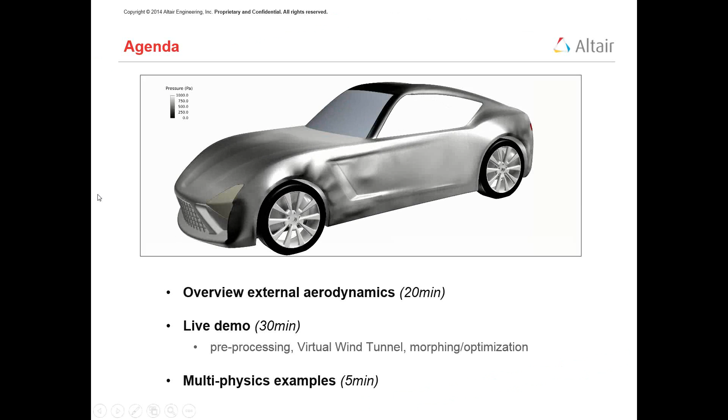So this is a short agenda over here. I'll go over some of the critical aspects of the domain, the dimensions of the domain, how to set up the case, and what things you need to take care of beforehand.

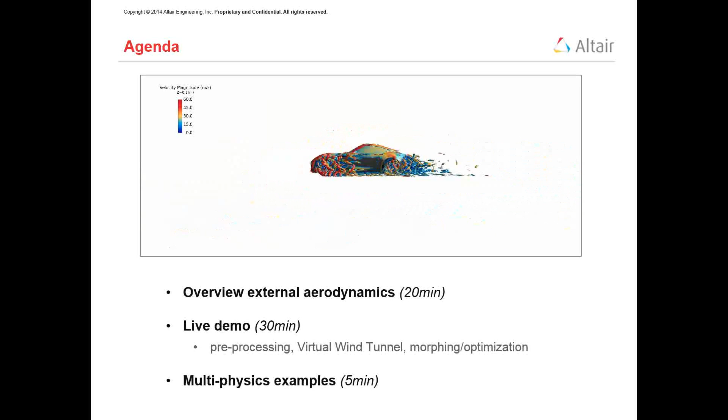I'll cover that for about 20 minutes, and then I'll go directly into a live demo where I'll show you actually how to set up a case in virtual wind tunnel, and how you can also do minor morphing, like design changes, again get it back into virtual wind tunnel, and then do the optimization kind of studies.

And then I also have some videos, like eye candy videos, to show you about multiphysics, mainly FSI or acoustics kind of studies. But it's too much information if I have to explain everything, so right now I'm just going to have eye candy videos to show you.

So why do we do external aerodynamics? Mostly, a lot of things depend on the outer shape of the car: its performance, fuel economy, how much can be the maximum speed of your car, acceleration of the car, and for the cooling of engine, transmission - all these are really important components. They need to be cooled.

Also, if you think of comfort of the driver in the cars, you need a good HVAC, especially if you're sitting in Arizona in the month of July. Then you need to have a good HVAC, and the air which is blowing over the car is the same air which is ultimately used for your HVAC, so it needs to be channeled or guided in a proper way, so that you have effective cooling or heating.

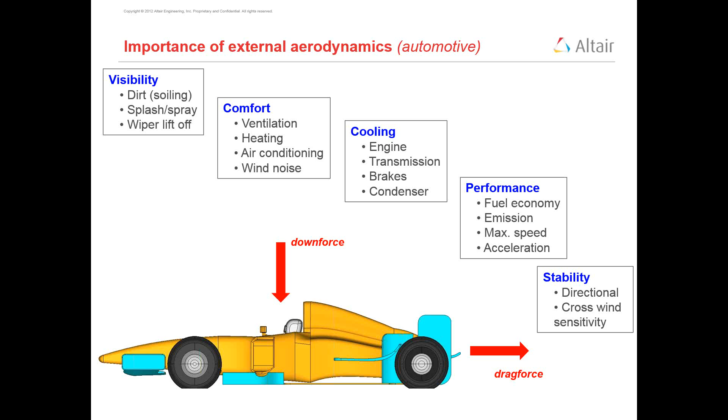And then there's also a drag force. Drag basically depends on a lot of things in the car design. It is ultimately a resistance to the car, so it has to be reduced as much as possible.

And then there are things like multiphysics. For example, the spoiler over here at the rear end, if it is flapping and flutter and starts vibrating, and if at all that frequency matches with the natural frequency, all of your car is going to vibrate very badly, and you really don't want that.

So FSI is fluid structure interaction, and this is one important area of research in F1 cars. Or there is also aeroacoustics, because the wind which blows over the car generates some eddies, and those eddies are traveling from the side of the car, which is very much at the same height as your ears. So if they generate any noise, it's really going to be uncomfortable for the drivers. So even that becomes a part of multiphysics.

This diagram at the top, it's the three things we are really concerned of: drag, lift, and side force because of the cross wind sensitivity. Now, the lift is actually a force in the upward direction, which is not required, but which is generated in the car systems. We actually want a downward force, but the lift is the upward force, and we don't want that. So lift, drag, and the side force are the three forces to avoid.

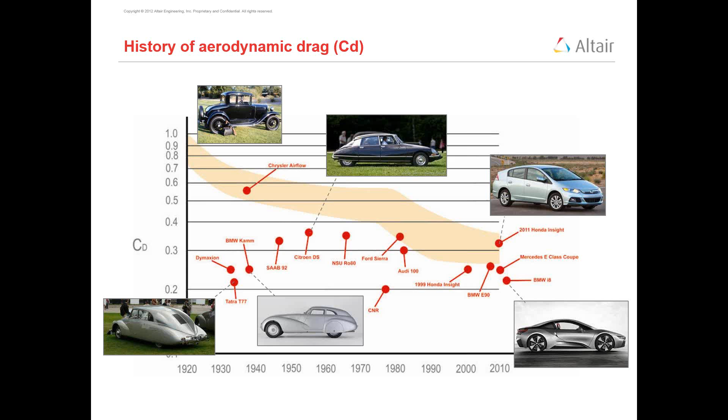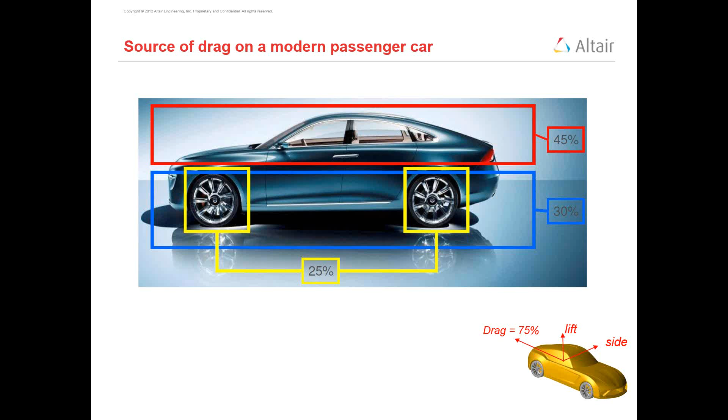How they design the upper body, which is actually the face of the car, and then the technicians and the designers have to come to some compromise point where it looks good as well as it performs well. So that's always a challenge.

And when designing the rim, you also have to remember that the rim not only has a drag, but it also helps in cooling the brakes. So you cannot neglect that fact, a very important aspect of rim design.

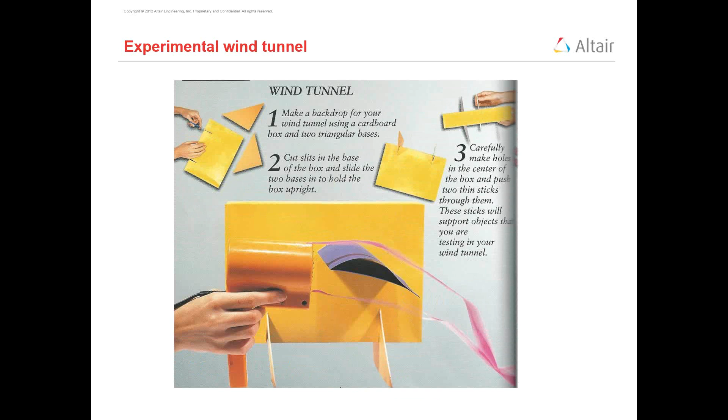So yeah, different kinds of testing, and there are always sensors around which calculate the drag and various different things in the test area. Also, the cars can be tested in full scale or scaled down models.

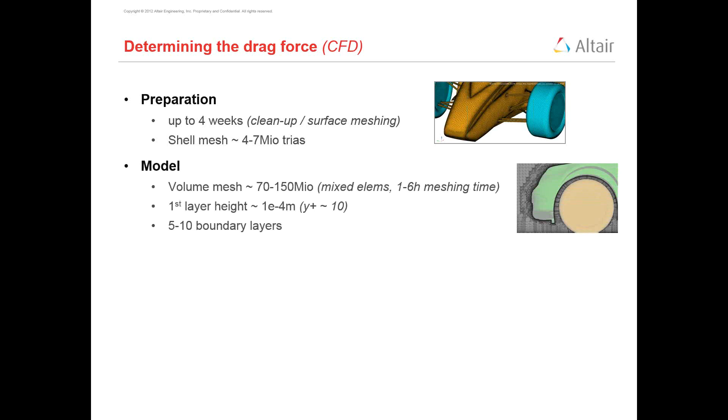So I try to eliminate and reduce my model, then connect it well and then surface mesh it. Those things do take a lot of time, and they are boring sometimes, but they are really important. Then the volume mesh goes anywhere from 70 to 150 million. It shouldn't take as much time for the volume mesh if you have prepared your model well.

Then in CFD, there is also something called boundary layers. These are the mesh layers close to all the car parts, mainly to capture the wall gradients from the car to the outer domain. These boundary layers can be as small as 1e-4 meters. And on the actual car surface mesh, you can have a mesh size somewhere between 2 to 10 millimeters.

It depends on how much of the details you want to capture on the car, or if you have some extra details on the rear side of the car, like special wings, then you might need an even smaller mesh size over there.

For the CFD run, it's always good to run a transient, because the process in life is actually transient. It can take about 2 or 3 days to run the transient model, again depending on how many cores you are using. It's usually simulated for a physical time of somewhere like 3 to 4 seconds, but it is going to take more than 2 days to get the results.

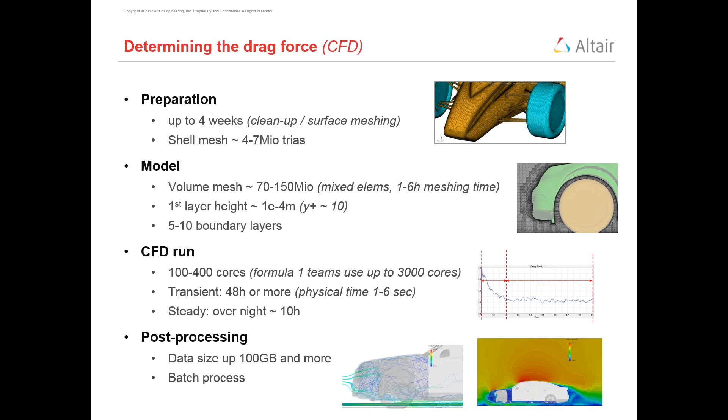And when you have all this simulation ready, you have a lot of data to post-process. So you need good machines, not only to run your case, but also to handle all this data, because you may have requested a solution on different surfaces, cut sections, or different points, and the sizes become really huge.

A few of the modeling aspects: when constructing a wind tunnel in a simulation, it's always good to have 3 car lengths of distance in front of the car, and about 7 or even more car lengths at the rear end of the car. The blockage ideally should be like 2%, and by blockage I mean the ratio of the car frontal area to the inflow area. That has to be only 2%. So that is a rough idea of how big the wind tunnel should be.

Surface mesh: for any of the VWT or AcuSolve runs, I usually have tria elements over the surface, and my size, as I said before, varies from 2 to 10 millimeters. Then for the volume mesh, this over here is not actually a wind tunnel. These are the refinement zones I have built outside the car, but close to the car.

So I'm specifying a refined size close to the car, and then gradually increasing that, and I may not have a very fine mesh size far away, like at the 50-meter end of the wind tunnel. The mesh size there can be somewhere like 0.2 meters. But I do need refinement zones around the car so that the mesh grows gradually. You cannot ever have a sudden jump in CFD runs, because that induces errors, and that's one of the reasons for non-convergence.

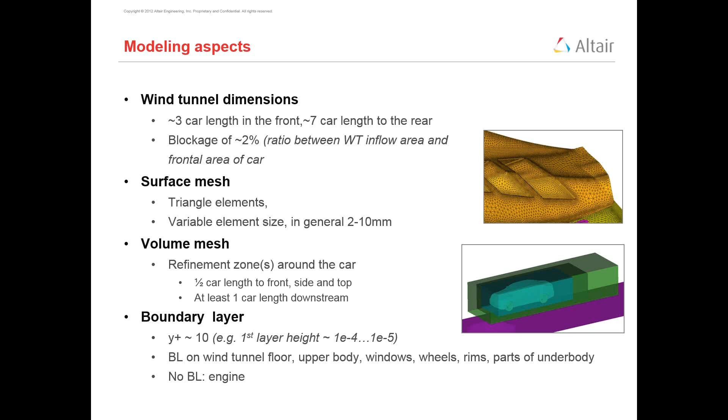Then there are a few things about wheel modeling, like how you can have the rotation of the wheels modeled. The first one is really simple: just have rotating velocity applied to the wheel, but this is a steady state run. The second type is MRF, which stands for multiple reference frame or moving reference frame. In this, you add an extra source term to the right side of the equations and solve them only in the specified zones. So these equations with the source terms will be solved only where you say that these parts are rotating. That is kind of a steady state approximation of a rotating flow.

And then there is also sliding mesh, in which wheels are actually rotating. So the outer face of the wheel is sliding with that of the car. So it's actually a transient run.

Then there's one more thing you can do: you can model your car as just half of the car and have a symmetry condition applied. This is a very good way, because you can have refined mesh only in one part of your car, so you're capturing all the details in the car but also limiting your mesh count. So sometimes this really helps in controlling your mesh count and still having good results.

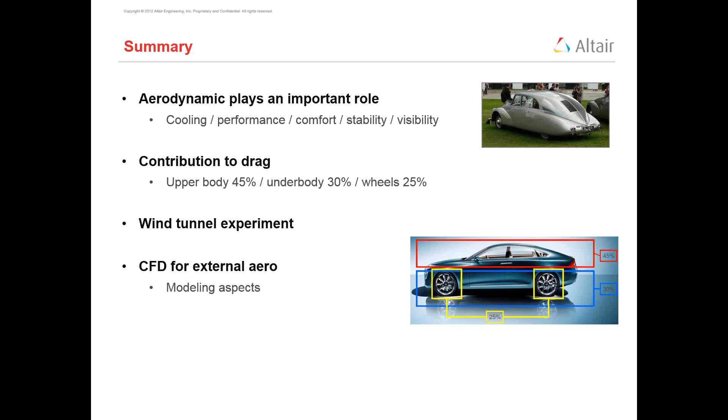Yeah, I do have one question. Okay. All right, we do have a couple of questions here, so I'm going to take a moment so we can go over those, Madhura. So the first one here

is the wind tunnel also given a symmetry condition when modeling a car using symmetry? So the question is, is the wind tunnel given a symmetry condition when modeling a car using symmetry? Yes. Okay. All right.

The next question is, what is the difference between transient and steady state simulation? Okay, so in the transient run, we are actually simulating what happens when the car is placed in the wind tunnel, right from when the wind starts blowing. The wind is hitting the car and we see how the flow develops from t equal to 0 to t equal to, say, 3 seconds. So in a transient run, we are getting the result of only what happens in 3 seconds, but it takes 2 days to run it. So you can imagine how much physics goes on.

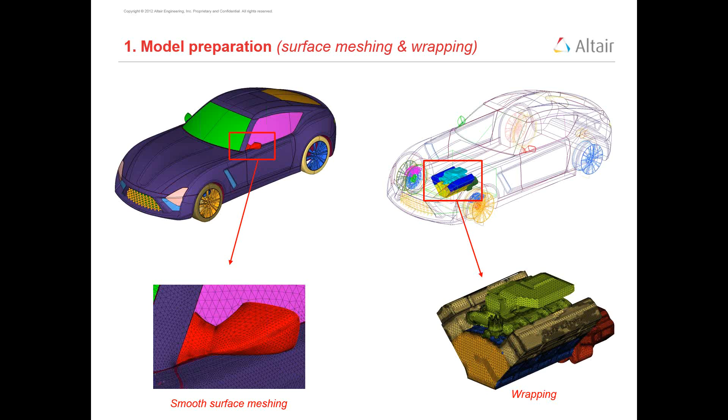Okay, so I'm first going to show you how to do surface meshing or wrapping in HyperMesh. So wrapping is meshing the parts, and it may not capture every single detail of that part, but it is one very quick way used in industry. So I have one part open over here.

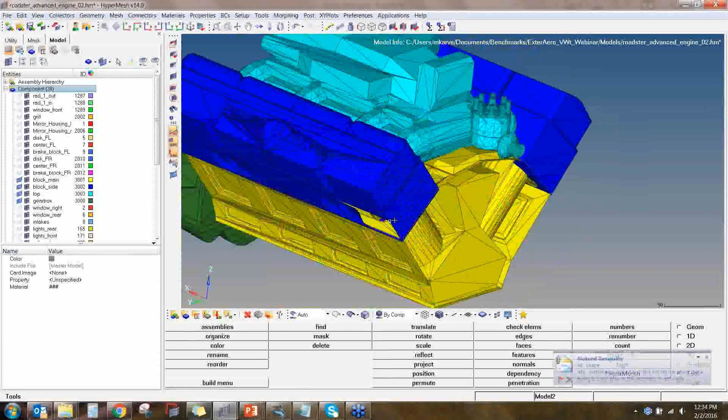And you see that I don't really have a great mesh over this. I just have some rough mesh; I don't need a very good mesh for wrapping. I just need some kind of surfaces so it identifies how the wrapping has to go. Now you see over here there are some holes in this CAD. There is this one on the blue surface, then there's also one surface missing at the bottom over here, and then also on the side this way.

So if I don't have it covered or stitched properly, what's going to happen is while wrapping it, it's going to go inside these parts, and it's not going to identify the part properly. I'm not sure if everyone really knows what wrapping is. Just imagine you are wrapping anything with paper. So that is what wrapping does in this mesh. It will identify the outer areas and put a mesh on all the outer areas of that particular part.

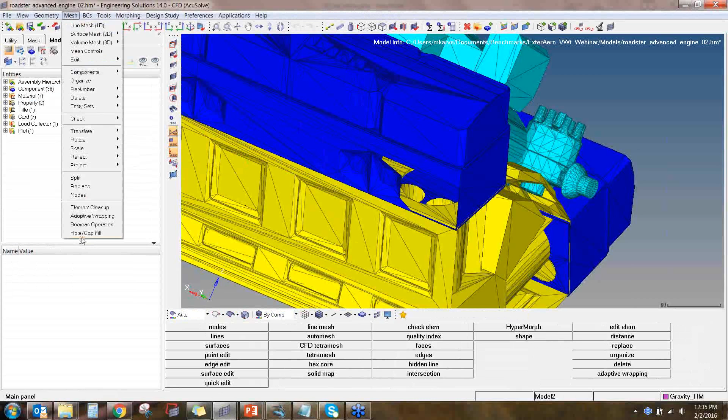So I'm quickly going to show you how to patch this hole. For that, open HyperMesh and make sure over here you change the user profile. Go to engineering solutions, select CFD, and be in the CFD user profile for this. Okay, so in mesh, if I select hole and gap fill, this is a very good and quick tool to patch things without much effort.

And what I need is to select elements, actually. I have to select patch fill, and then in the node list, if I select a few nodes over here, 1 and 2, then it identifies the path; make sure it has identified the correct path. If sometimes it doesn't identify, then you can unselect some of those wrong nodes, say proceed and say fill, and it created this patch over here, which looks good, not bad.

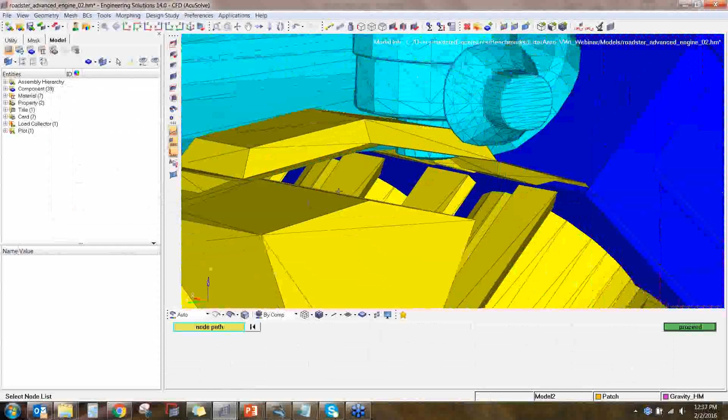Similarly, I can go and patch other sides of this. So node list and selecting a node path. Okay. So you see over here it selected some junk things and I don't want it. I want to unselect those nodes. Okay. Then, good. And say fill. Great.

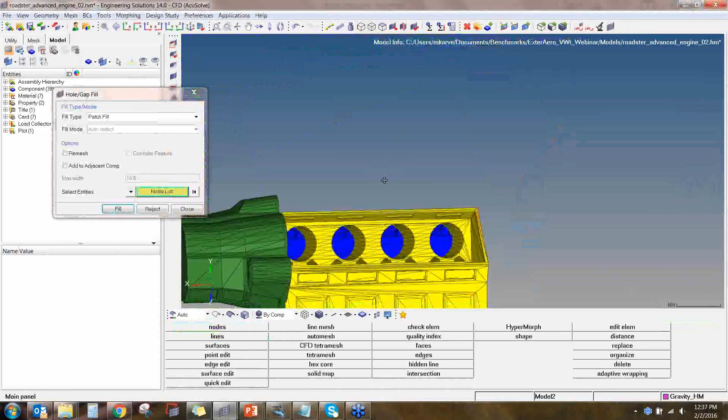You can try wrapping without patching it and see for yourself how it looks. Sometimes it does a good job, but it's always better to patch and do some work on the ground level. Proceed. Okay. So I have this mesh over here, and what I'm going to do is wrap it now.

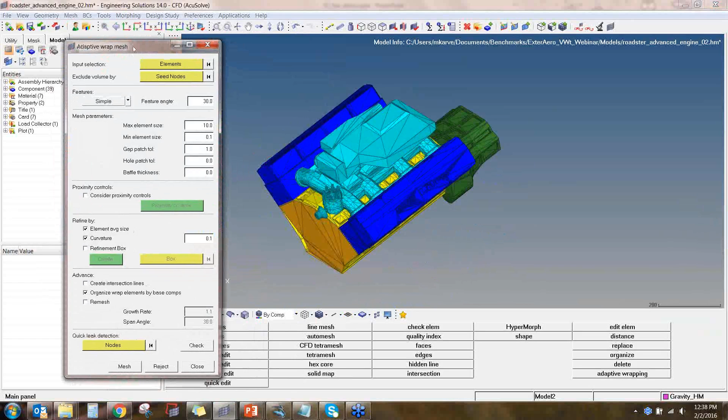So I go to mesh again and say adaptive wrapping. Even in this panel, there are some options to patch the holes, but I've already done it manually. So I'm going to select what elements should be covered in the wrap and just select a block. Proceed. I can say remesh over here and again give some parameters. This looks good for now, and say mesh. And while it takes some time, let me go over... so yeah, this is the wrapping.

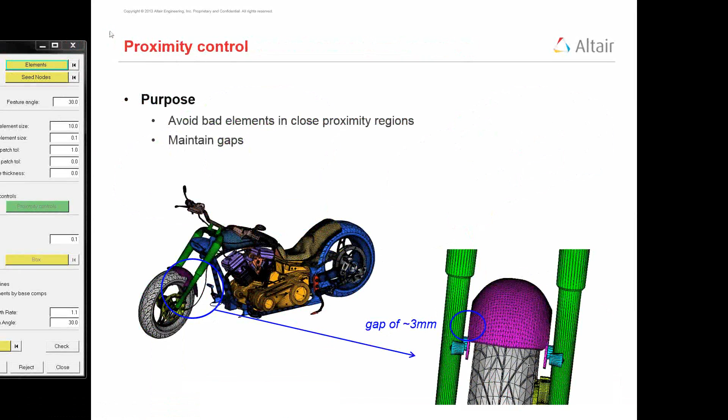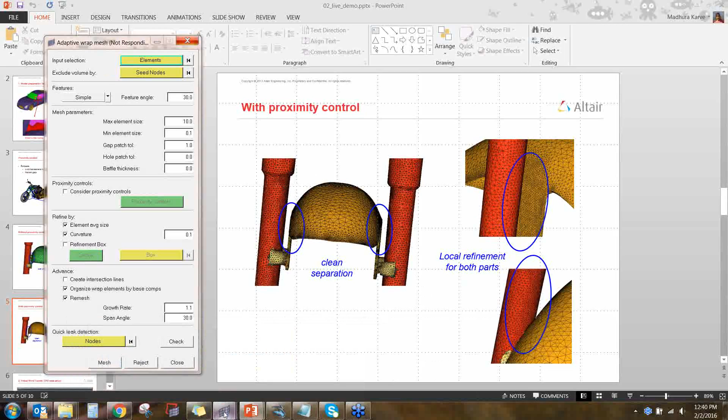That way, you have to specify two components, like this is A and this is B, and then it will also apply some local refinements in the gap and make a smooth, nice mesh in between that gap. So let's see if it has done it. Okay.

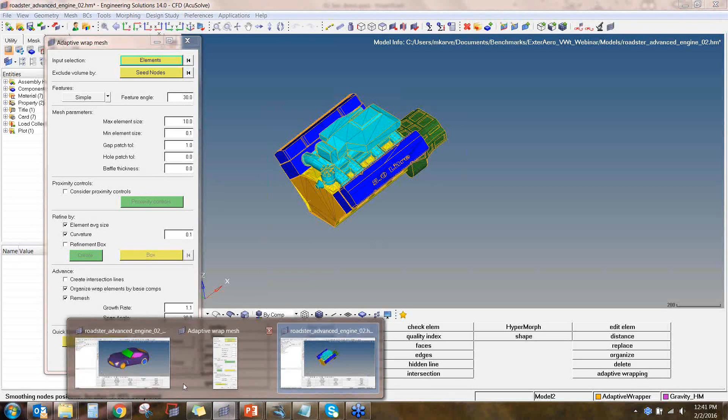Okay. So while it meshes, I'll show you how it looks. I already did it once, so yeah. So this is how it's going to look after it's finished wrapping. You can see it has captured all the important details well. It does look good enough.

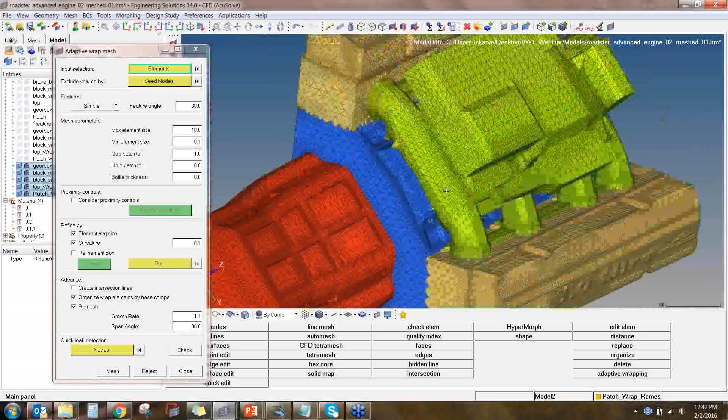So moving forward, meshing the rest of the components in your CAD, there's one panel which I use, this auto mesh panel. There are different ways you can access this auto mesh. It's right here, or also in Mesh 2D and auto mesh. So surface deviation is one of the menus I use. There are different menus over here. You can play and see how it behaves.

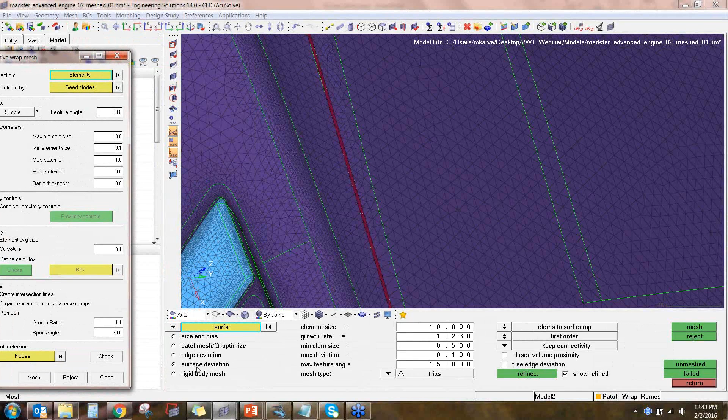But surface deviation is very helpful for geometries like this. You can specify, and it will capture the gradients and mesh it accordingly. Like you can see over here, at all the curvy edges, it tried to have a finer mesh as compared to the rest of the mesh. Also, you can specify the refinement surfaces. I am still waiting for this to finish so I can actually show it to you.

Okay. Now this is a rather large model. How long does it normally take? Right now you're doing it on your laptop. Actually, I did it previously, and it didn't take such a long time. Surprised it's taking long right now. Okay, I think it's done.

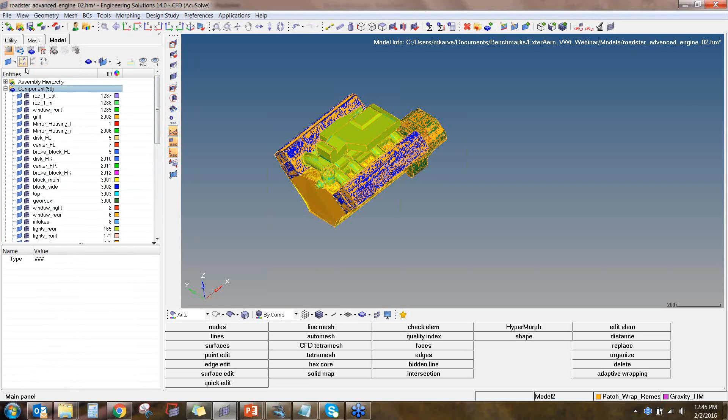Okay, so if I switch on the CAD, this is the remeshed part, which has a suffix like wrap and then also remesh. So what I'm going to do is isolate all these and also change the color. Okay. So yeah, you can see over here. Probably I had some different sizes than when I did it previously, but more or less it looks the same.

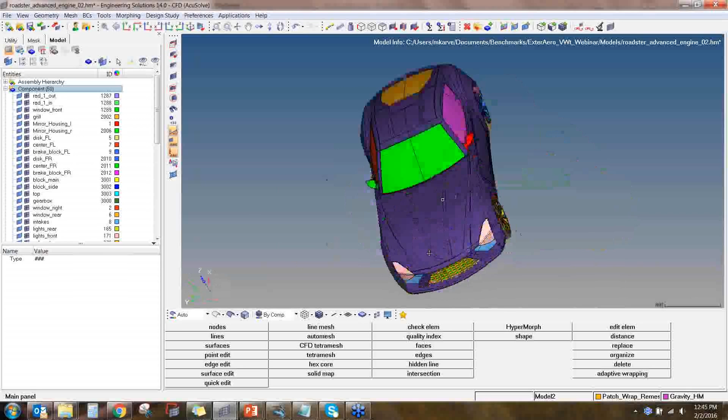Then let's go over the rest of the meshing. If I have to do all the meshing, it's really going to take a long time, but I'll quickly show you this auto mesh panel. In this surface deviation, let me just select a few of the surfaces and then mesh it. Hit mesh.

Yeah, I actually did this yesterday and it didn't take a long time at all. So we have something that's running. It's taking forever.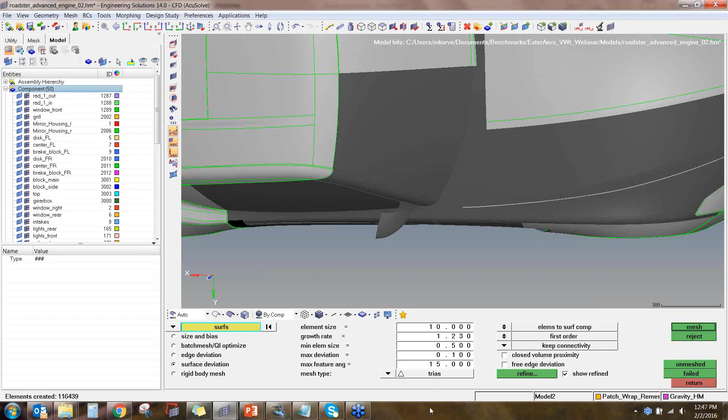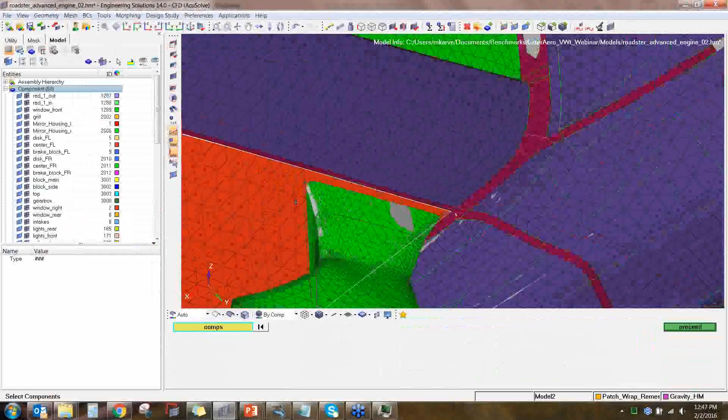Okay, so I have some mesh, and you can see over here that this mesh is not really a closed, airtight mesh. So there's one more tool which I can use. It's a Boolean operation. Even when you have meshed your parts, you can Boolean them. So I pick component 1, proceed, then component 2, which is this red colored mirror. Then I hit local remesh and run, and it will do the Boolean over the mesh.

Okay, so yeah, it did it. Now you can see all the nodes are matching nicely. So this is one easy tool to fix the mesh. You can also use this refine button over here. If I select some of the surfaces and say I want refinement over this particular surface, specify a smaller size, 0.5, say assign, and it will show you this in red color.

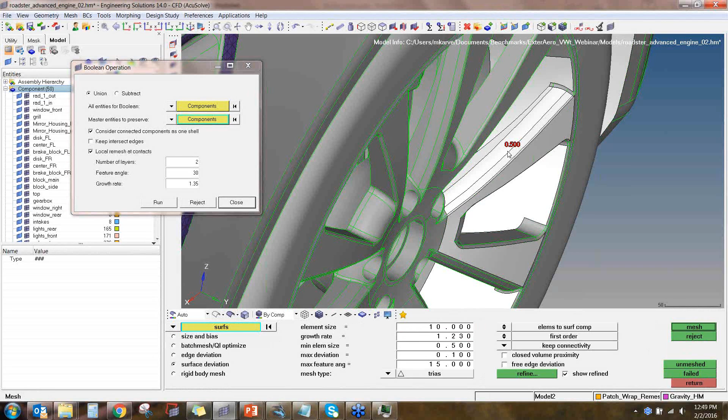That's the assigned mesh size, and if you mesh it with a higher number, it will do the refining for this mesh and also the smoothing from the refined to the higher mesh size gradually. So that's one more good tool to use. All this meshing may take a long time, but you have to do a good job on it, especially these grills over here. You need very nice mesh over them. These grills are doing a lot of things in the model. So make sure you have proper mesh over them, or any other tiny features at the rear or at the wheels.

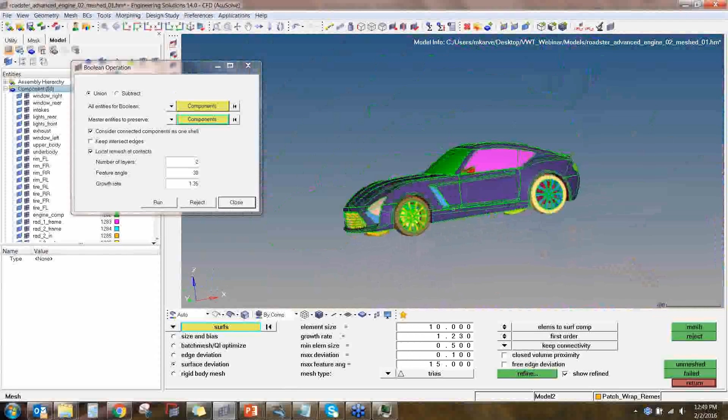Okay, so I have finished my meshing, and the next step is to go to export. This is my completed model. I say export, select CFD type, and in the solver type make sure you have Nastran Fluent standard format, and hit export. No, I have to select. Okay. And yes. Alright, so I had some duplicate elements over here.

I'm going to go and say check elements, duplicates. It found 10 duplicates. Say failed, return. Then go to the delete button, which is this shortcut over here. Say retrieve, and it has retrieved those 10 elements which were detected as duplicates, and say delete. Return. And I again hit export. Say yes.

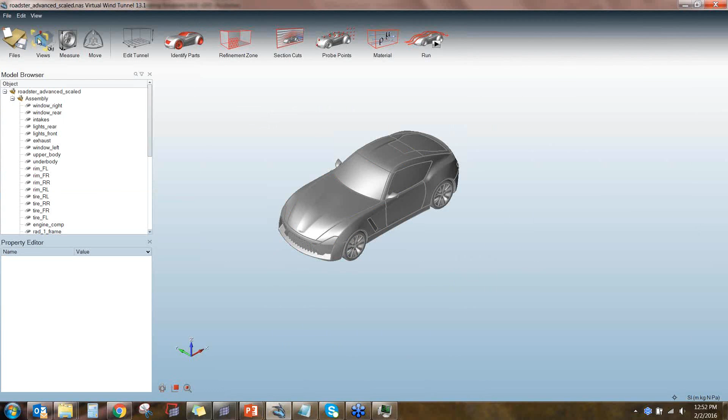Okay, so it exports, and this is how it looks in VWT. You just go to file and find the exported Nastran file. There are different views over here. Just hover your mouse over different sides, and it will show you what are the different views you can have. So I'll normally keep this.

Excuse me, one question. How long did it take to import the model? Oh, no, it shouldn't take long, like a few seconds. There's many hundreds of thousands of elements. It only takes 3 seconds. Good to know, excellent.

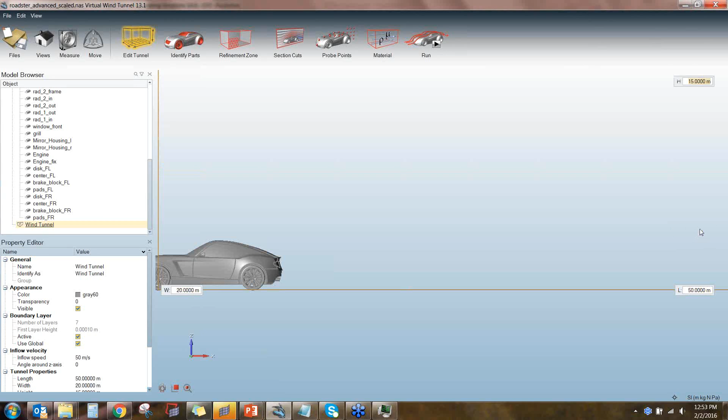Okay, so moving on, let's go with defining the wind tunnel. Just click it over here and say fit screen, and it's going to show me the default dimensions. But as I said, you really need to have a proper dimension with just 2% of blockage. So I'm going to say I want it 50 in length, 20 in width, and then 15. Okay, so this is how it looks.

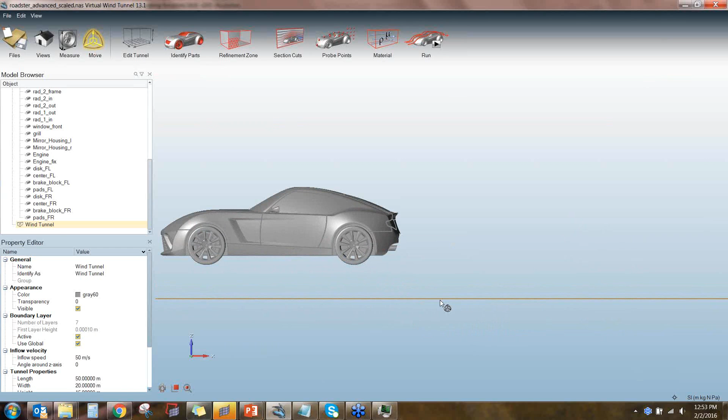Okay, looks good. And then one more thing which I need to make sure, I'm going to say move and go to wind tunnel. So it gives me XYZ coordinates. And then move this at the bottom and get a proper zoom over here. And then make sure I move my wind tunnel in Z direction.

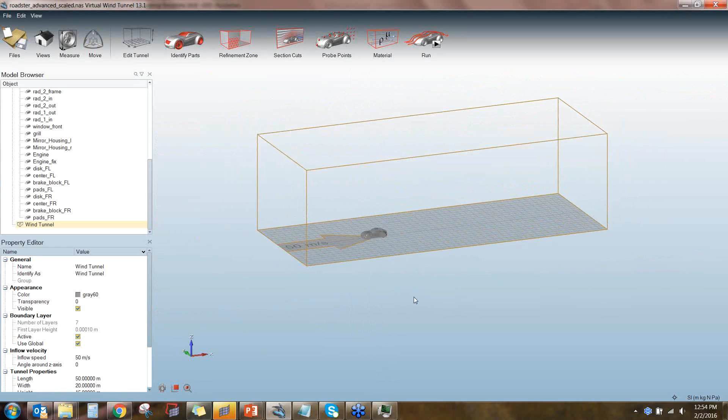Okay, so I want the wind tunnel to intersect my wheels slightly. Make sure your car is still inside the wind tunnel. Sometimes, when you're moving things all over, it happens that the car comes outside your wind tunnel. So just make sure your car is still inside.

So let me hide this wind tunnel now, and then the best way to set up the case in VWT, or most of our products, is always to move from left to right side. So we're done with the wind tunnel. Now we are going to identify different parts.

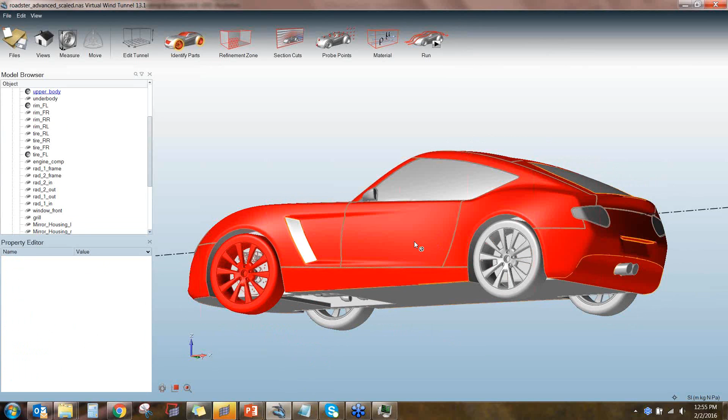Okay, so if I hover my mouse over this, it will show me identify wheels. So I'm going to click that and click the rims and the wheels. So this is my tire 1. Oops, I selected the wrong thing, and I have to deselect it. Why is it not deselecting? Okay, so deselected it and go to the second wheel. This is my other wheel.

Okay, and you can see it has also identified the rotation direction of the wheels. It's based on the wind direction. So you see over here too, it changed the icon. And if I click on the rim, it will show me that this rim belongs to wheel 1, and then there is a tire which belongs to wheel 2. So it has identified rim and tires, and then put them in wheel 1, wheel 2, wheel 3, wheel 4.

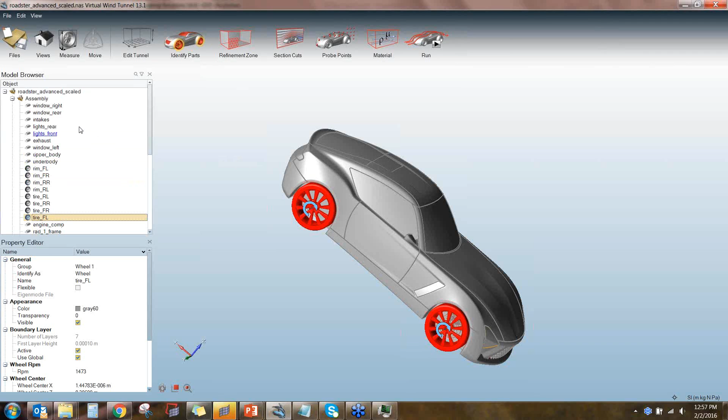The next thing will be identifying heat exchangers, which is the radiator. So what I'm going to do is hide all of the things, and switch on all these parts which mainly make it up, or you can select, right click and say isolate, it will show up. Say isolate, okay. Oh, come on. Anyways.

Okay, I want to make sure I'm still in the right direction. So, identifying heat exchanger.

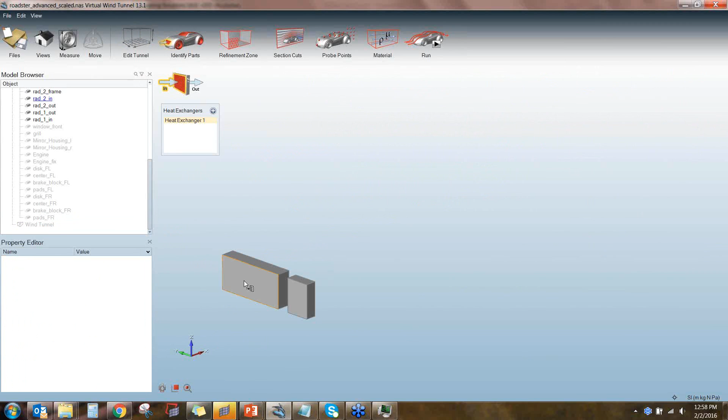So I go here, and then the first thing I have to do is select inlet. You can see this over here is highlighted. So select the inlets, this one and this one, and then the next thing is to select the outlets. Go over here, outs, and see this is my outlet and this is my outlet. So when I specify inlet, which is blue, and the red is outlet, the remaining thing it will automatically detect as the frame.

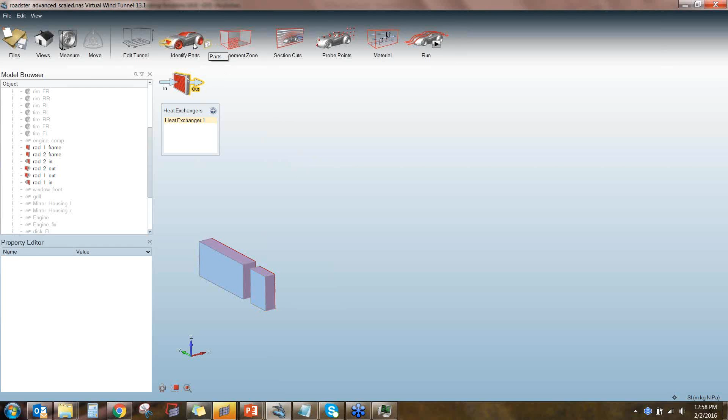So you see here again the icon of all the heat exchanger elements have changed from the default to the special thing. Then what you can do is there is this small icon for almost all of these options over here, and if you click it, it gives you a nice summary of all the parts in it, what they are identified as, and then you can also select which of them you want to have or not. Like if some of these things are really in the interior, you can uncheck this boundary layer, so your mesh size is not blowing up.

Okay, we have identified all the parts. Let me switch on all the CAD or mesh.

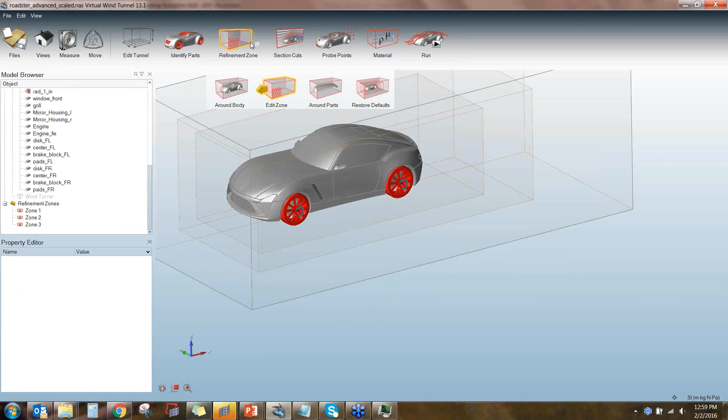Now, this is the refinement zone. You can build as many refinement zones as you want. If I just click one, there are by default 3 already defined, and then if I go to this tabular form again, I can specify these are the default sizes of element sizes, but you can definitely change them. You can also change the size of refinement zone.

If I click this, you see that it will show you the direction, and just drag your sides to whatever lengths you want. Similarly, you can do this, or you can hide some of the zones, or if you have defined them and don't want them, you can uncheck this button over here so it becomes inactive. So it's defined, but it's not going to be effective.

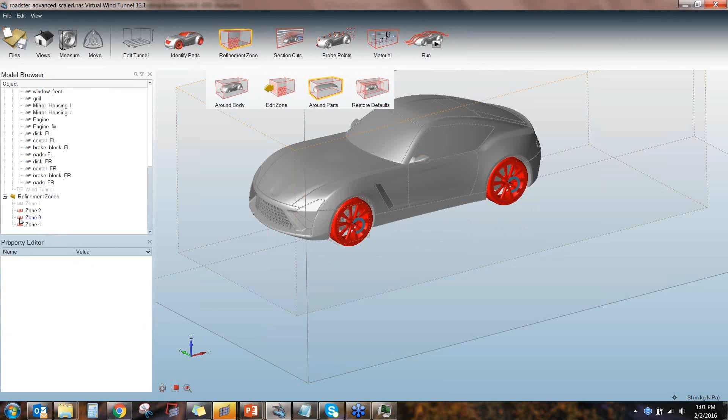If you want a special zone around, especially around some special parts like the upper body or the wheels, I can specify that I want it around this wheel, and then so this is the view I want, and easily drag this face.

Somehow it's not picking it up. Okay, so I can just change - I showed you how to change, but somehow it's not picking the right face over here.

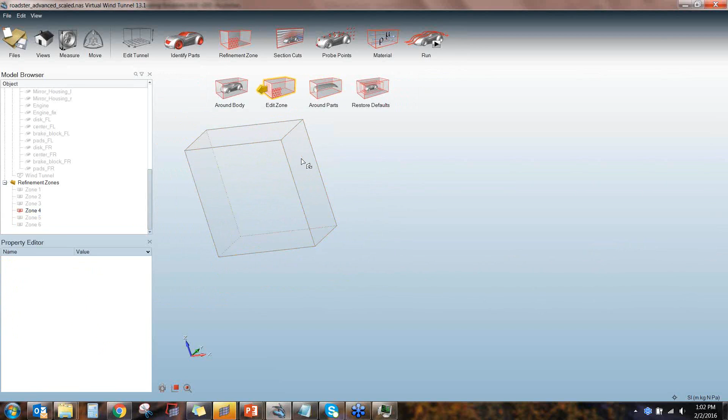Oh, I know why. I was not in the right option. So, okay. So you can change this, drag this. Make sure you're clicking this edit zone and then clicking the boundaries. So you can stretch this side as much as you want, so that it covers both of the wheels together, and again specify different refined mesh size over here.

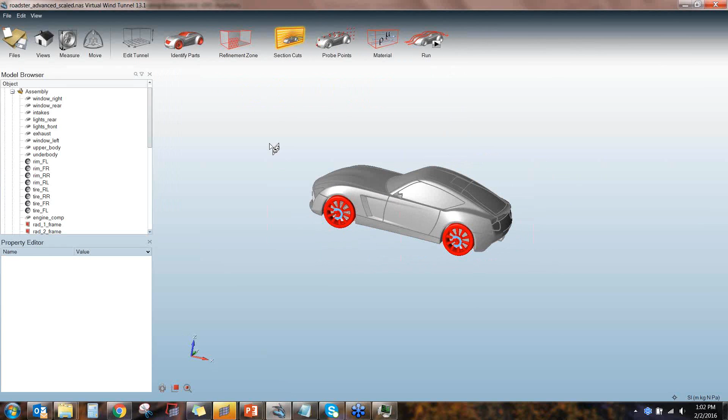Then the next thing you go to is section cuts. So section cut as well as the probe points are defined so that you get the results on all these sections or all the points. And at the end of the VWT simulation, you get an automated report with all the contours, and you can choose which contours you want it to plot.

So let me first create the cut section. So this is my one cut section, and then this blue shaded section is what it is right now showing your cut is. So I can still add as many as I want. If I want it in different directions, just switch that and switch on to the locations.

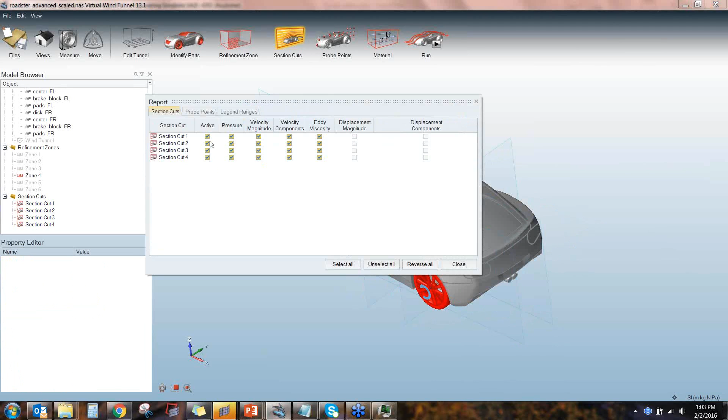You can also have the exact location depending on this, XYZ over here. Put in the coordinates and change the location of the section cuts. And if I open this table again, it gives you all these different results: velocity, components, eddy viscosity, pressure, velocity. And if you don't want all these results, you can uncheck them and select what you want to have output.

Can you rename the section cut names? Yeah, sure, you can do that. Over here, rename - you can rename anything, even the zones.

Then similarly, you can create probe points. Just click this, and if I especially want to see how the eddies happen around this mirror part, I click here. I can also move it, or if you know the exact coordinates in your CAD, enter the coordinates and you are all set.

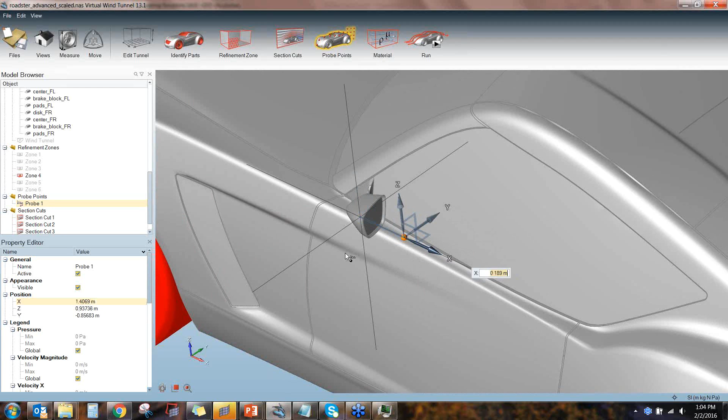And all these things which I've generated, you can see it in the side tree diagram: refinement zones, probe points, section cuts. You can directly delete it from here. If you say isolate, it's going to only show you that particular thing.

Where is it? Yeah, another question from a little earlier: is it necessary to model the heat exchangers exactly, like modeling the fins or tubes? No, I don't, I mean, not really.

In this heat exchanger which we have right now, it's not really modeled. It's just the outer size of the radiator. Ultimately, this will be modeled as a porous media in the CFD run, but you just need to identify which is the flow direction over here. So it may not be the exact tubes and the things. Even here, I don't have it - I just have the outer part, outer size of the radiator over here.

So it really depends on where you want to focus your analysis on. If you really want to fine-tune around the heat exchanger, your model should be done for that, I would say. So in a large model like this, you probably don't want to go for the detailed results of the heat exchanger.

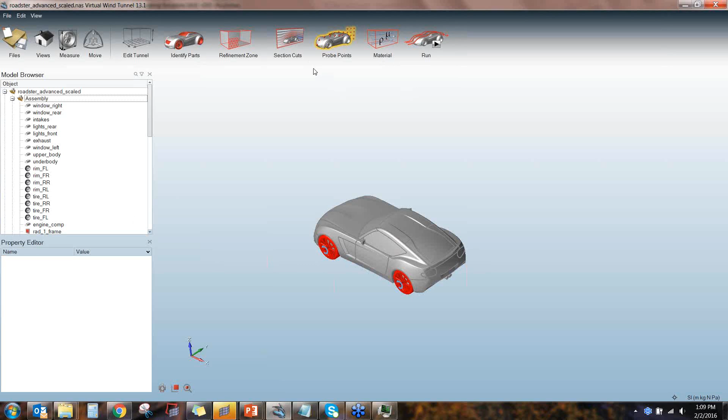So we have put in the section cuts and probe points. Next thing over here is material. By default, we do have air and water, but you can also define your own materials. And then hit this run.

So run has some of the mesh setup over here. You can also decide, like give the wind speed over here. By default, I think it is 50, and that's why when you load in your wind tunnel, you can see this 50 meters per second and the direction of the wind. Then you can decide if you want a transient or a steady state run. Run time, as I said, is usually about 3 seconds, and the time step can be as small as 0.001 or even smaller. So when you finish 1000 time steps, that's when you get a solution after 1 second. The time taken for those 1000 time steps depends on how many cores you're using and what the mesh size is. So it's important, every time you're doing these kinds of runs, to have the right balance between capturing all your features and keeping your mesh count in check.

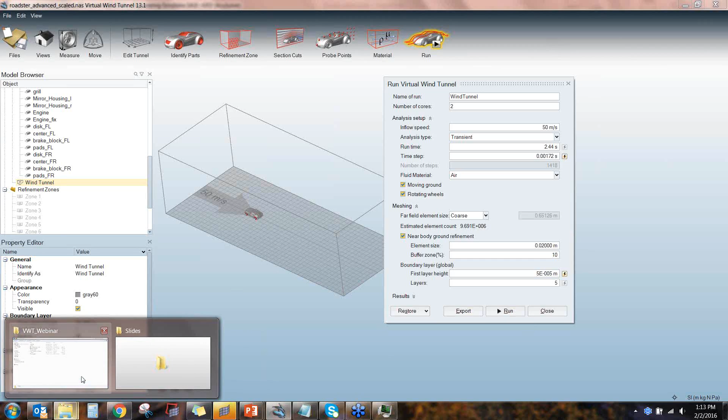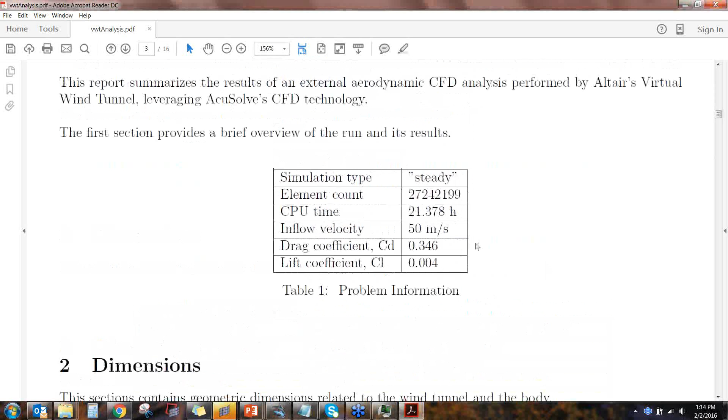And at the end, as I said, it creates this VWT PDF report, and this is how the report looks. Okay. So it will give you all these details, like mesh, simulation time, what kind of simulation it was. Drag and lift are automatically calculated over here. Then element count of the volume mesh, size, dimensions, and all these pictures it will automatically generate at different section cuts which you have defined.

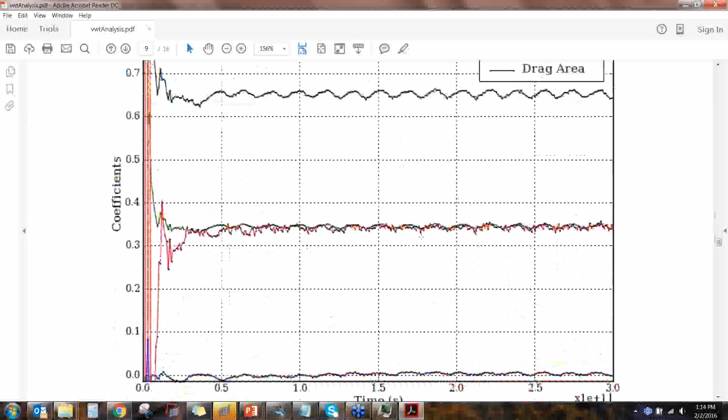So it has also calculated drag on each and every component. And that's by default. Yeah, it's by default, and all these contours, whichever you asked for, streamlines, and I think the plot which we saw at the top was for the probe points.

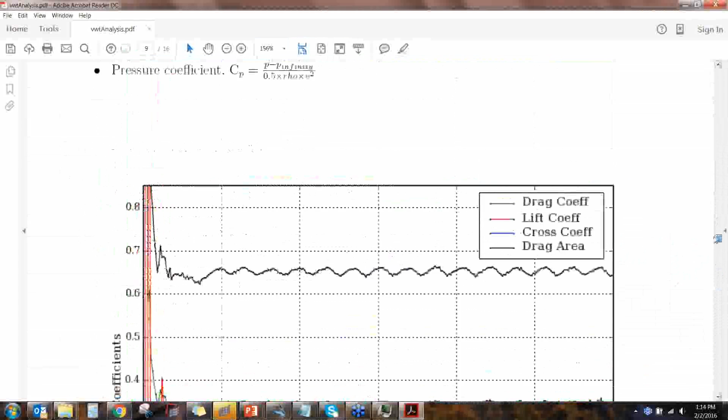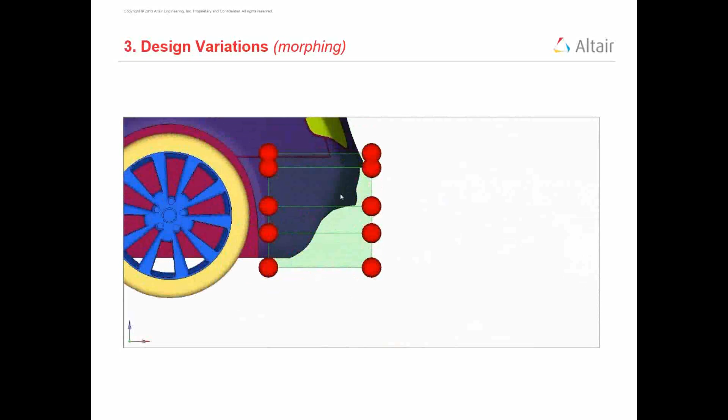Okay, so this is mainly the VWT part, and as I said, you can also do some morphing. So morphing is quick design changes to your model. I'll play this nice video over here, which is done in HyperMesh. These red dots are called handles, and you can generate these handles and just move them along XYZ, or if you have the coordinates, you can also move it to a particular coordinate, change your design, have the model ready, and again export it as a Nastran file.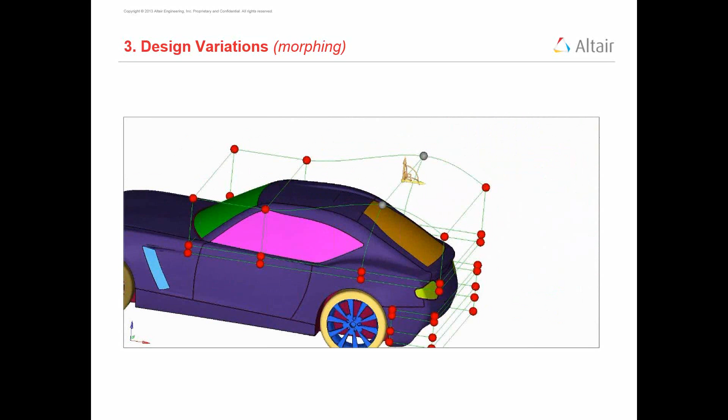You don't need to mesh it again. Everything is automatically taken care of, all the surface mesh. Just get it back into VWT, and you don't really need to do anything because you already set up a case. So let me show you. So for example,

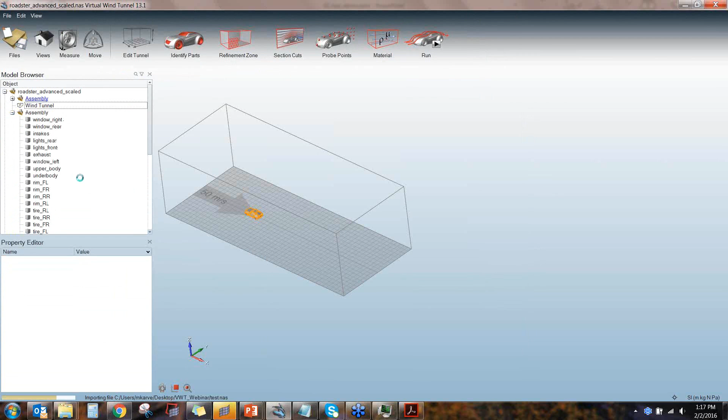if I go back to VWT and say that I have one more morphed design, then I go here and say import, desktop. Maybe right now I'm going to import the same file just to show you. Okay, so you see here it imported the second model.

Say delete over here. See import. What else? Okay. You don't need to delete the first model. I'm sorry, the earlier model was at a different scale, so it showed me something very big. So now I have these two models over each other, and I can delete the first one, and since I have approximately the same dimensions, I don't need to do anything other than just identifying the parts, and most of the refinement zones which I had defined earlier are going to match

because the car was at the same position. So when you bring in the models and construct a wind tunnel around it, it's always good to keep the position of your wind tunnel. So if in the future you have any design changes, you don't have to redo setting up the wind tunnel and refinement zones again and again. You already have it. You just get in the model and hit the run button. So that's one good thing.

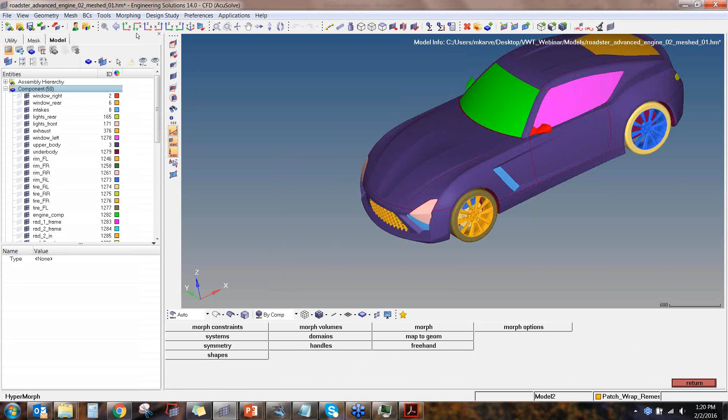And let me quickly show you morphing. If you go to HyperMorph, there are a lot of options over here, but I'll show you some quick ones right now. So go to morph volumes and say create. Select the elements around which you want the morph volume to build.

So, okay, so this is one block, and what this suggests is all the elements under this green morph volume can be changed with the handles which I have over here. I want to change the size of the handle. It's too big. Okay.

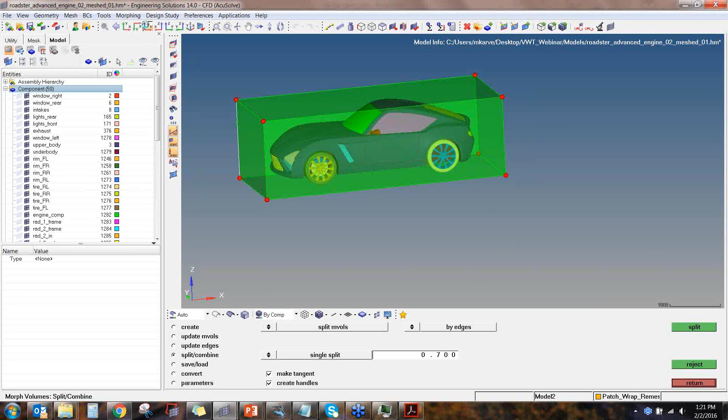And I can split this into different components, into still different sizes, and the splitting option is very quick and easy. I just place the cursor over here. Now this number over here is actually giving you the fraction of the highlighted edge. So I can change it from 0.5 to 0.8 or maybe 0.7 and say split, and it will cut the volume and create two more handles at that level.

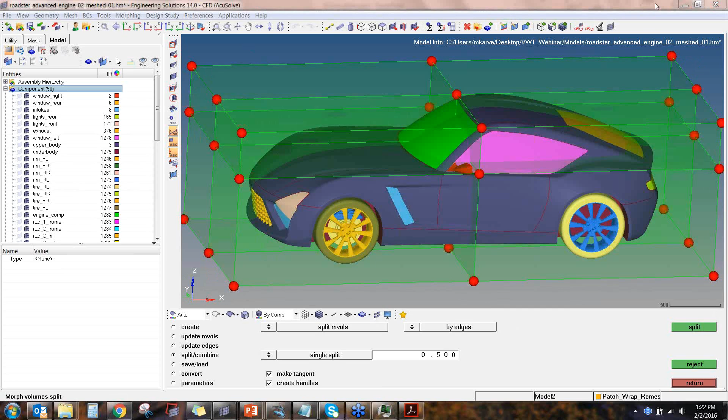And then let me do it at this 0.5, say split, and one more in Y direction, split. Okay, so now what I can do is just change the shape. If I want this to,

so go to morph over here, select the handle which you want to move, and you're going to see this tripod. Just hold it, highlight one of the axes, and start dragging it. What is wrong? Yeah. So when you keep dragging, it will show you how the design changes.

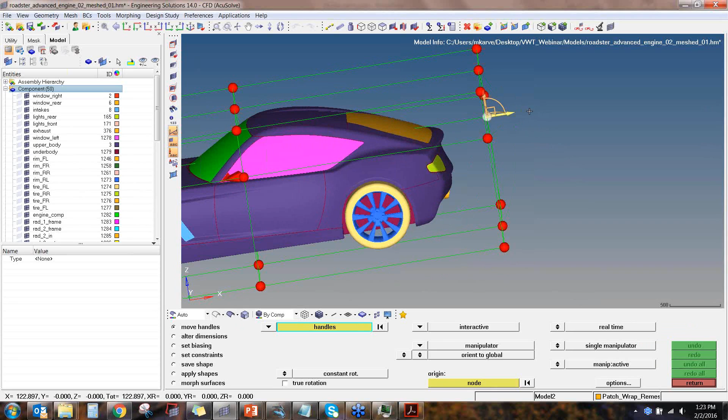Or what you can do is, right now I'm in this interactive mode. I can also have move to XYZ or move to a point, and then if you know the coordinates, you can put in the coordinates and say morph. So I'm just going to say morph. Return. And then export this model.

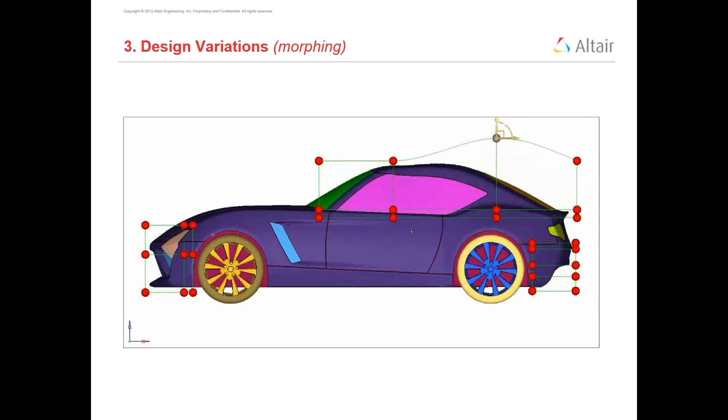So you can do a lot of changes, like this video shows over here very nicely. They change the shape of the car, raise the hood a bit, raise the upper body shape a bit. Okay.

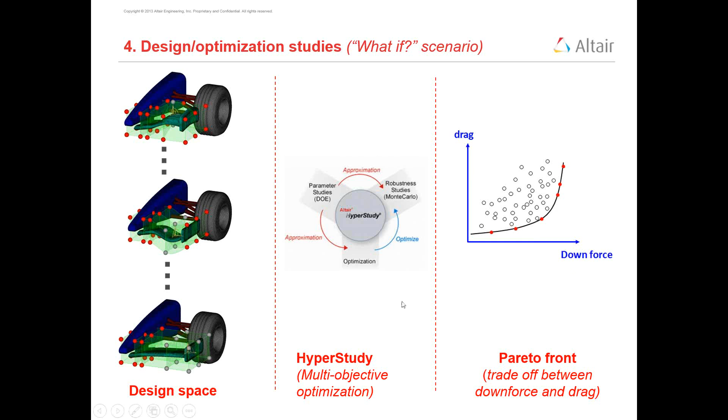And on clubbing it with HyperStudy, the optimized design gave us 120% higher mass flux, which means the initial design was really not good. The first design, where the bend was on the upper side, gave a more optimized design. And you see how for the straight design, there's stagnant flow in the front area of the brakes, and that is resolved better if I have some twist or curvature to this pipe. So you see these eddies stuck in front of the brakes, and that's why the cooling was not as effective.

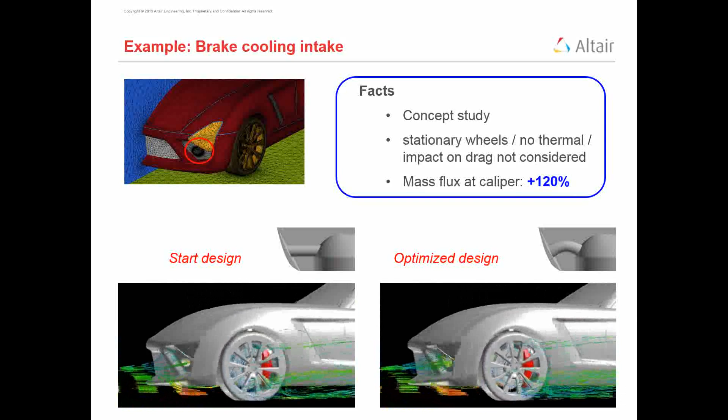Yeah, actually, that is all I have for today. Did I miss anything? I don't think so. Okay, and we do have another question. Can we export aerodynamic load, for example pressure, to HyperMesh in order to analyze the related structure?

Can you repeat it again? Can you export an aerodynamic load, so results from Virtual Wind Tunnel / AcuSolve, can that load be read into HyperMesh to analyze?

Like the structural loads, you mean? It's a pressure load. No, so if you have some structural loads or something, then that may be possible if you're doing like an FSI kind of run, because in that you need structural as well as fluid to collaborate together.

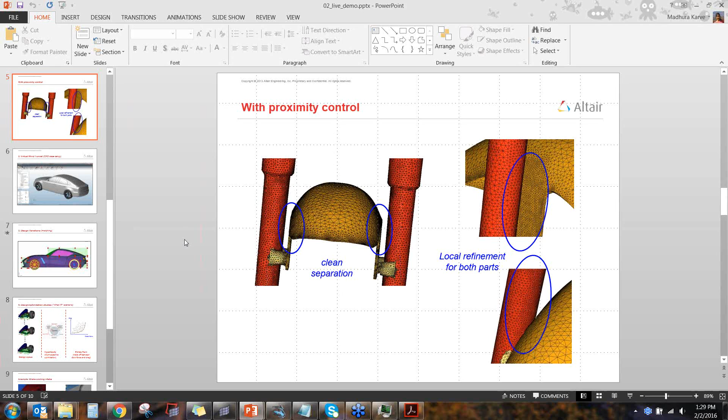So in some of the options in VWT, if you saw, there is this flexible option over here. So if it's an FSI run in VWT, which you can do, I haven't done it, but I'm sure then you do need a structural load file or OP2 file.

Okay. So I guess we need a little bit more detailed definition of what's being looked for here by the person asking the question. But we can also take that question offline. So the asker of this question can send us your contact information in the chat window. We can note that and contact you later, so we can figure out better what you're trying to do there. Because I'm not sure if it's an FSI question.

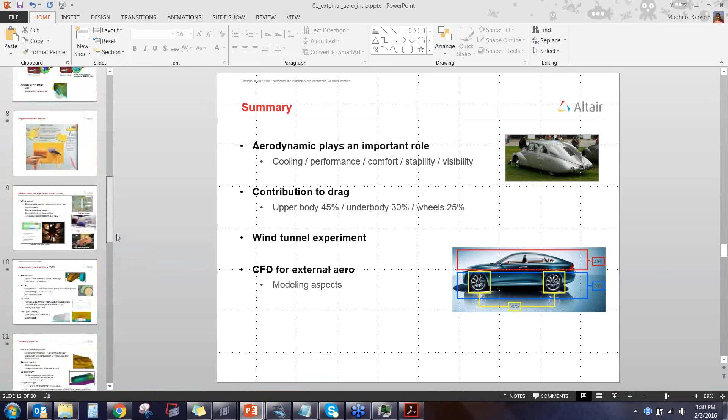Yep. All right. So do you want to see if there's any additional questions, Madhura, or is there some additional information you want to show? I don't think so. I have missed anything? Okay. No, I think you got everything. And actually, I just noticed we are at 1:30, which was the time frame. Nailed it. So that'll give like 1 minute to cover the other details. So let me do that right now.

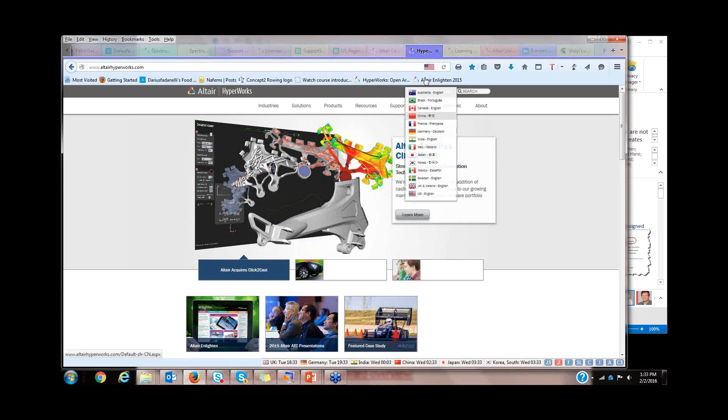use our products. The only thing about the student version is it doesn't come with Virtual Wind Tunnel, because as you can tell, doing CFD analysis requires quite a few elements. The model you had there, I think, had 27 million elements in it, so that was a pretty large model. The limit is currently 10,000 on the student version. But any competitive teams would get the full featured version that does not have any limitations.